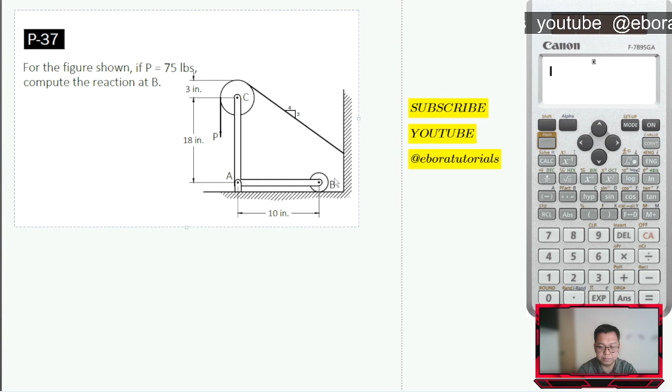Okay, so I think I now have an idea of how to answer this. Please correct me if needed, I'll double check as we go. So the only way I think I can answer this is by summing up moments at A. Otherwise we cannot do this since we don't have the reaction on the other side. We have the load P here, and an inclined force here. We'll be solving for RB, which is here.

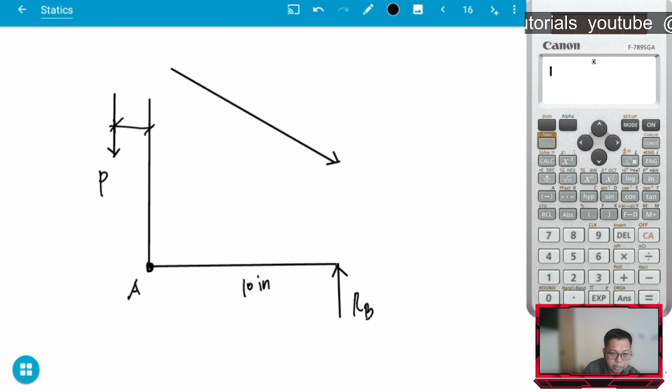So what I'll do is sum up moments at point A. This is our point A. What will rotate at point A, number one, is RB, which is 10 inches from point A - that's actually our goal. Aside from that, what will also rotate is this P, with a certain distance. This distance is just equal to the radius of the circle. Looking at the figure, that radius is equal to 3 inches as given.

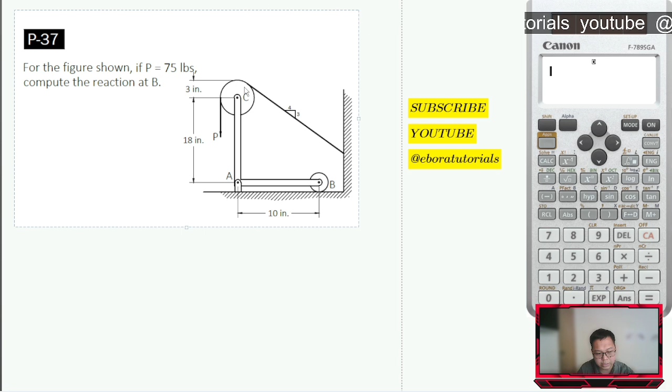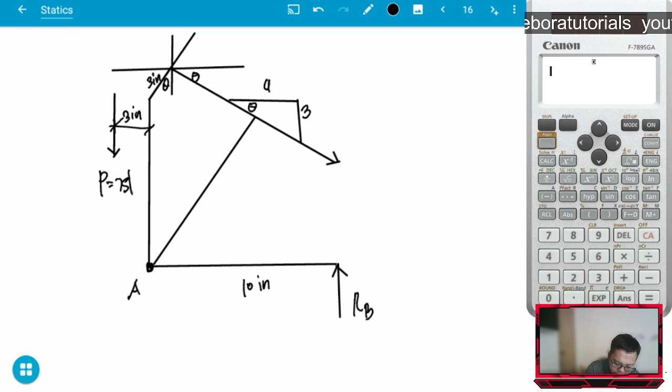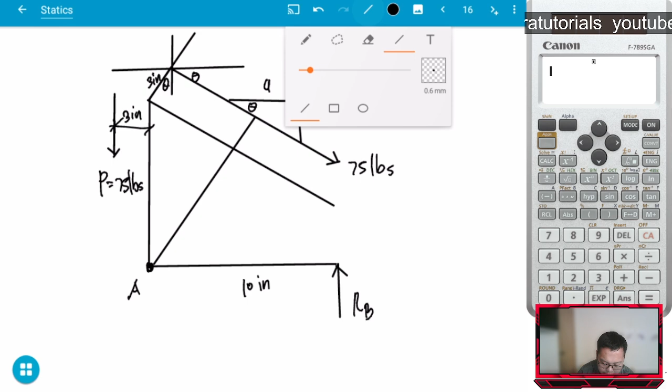We could use components, but since we'd still need a component anyway, why not go directly to the perpendicular distance. This load P is given as 75 pounds. So let's place that here. Okay, if that is theta, I hope you agree. Let's check this again - if that is theta, and this is straight, then theta... this is also theta.

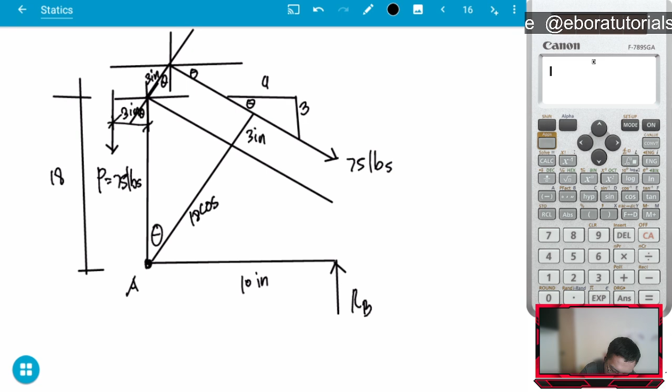It's important that we know theta. By the way, the height from here to here is 18 inches. Which gives us the distance for this - if this is 3 inches, then this is 18 cosine theta. I think that's it - we now have the moment arm for the two 75 pound forces. By the way, moment arm is the perpendicular distance. I think that's correct - 75, 3 inches, tangent, straight line, 3 inches.

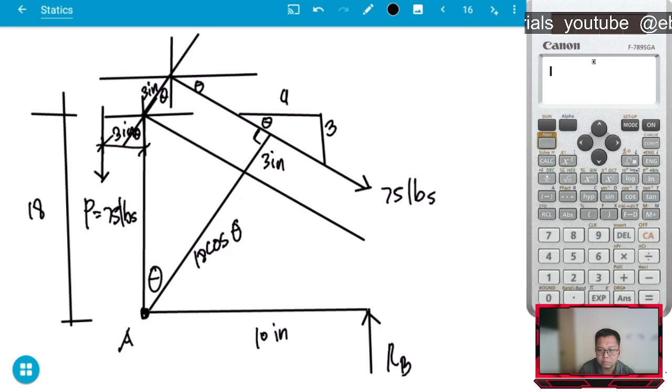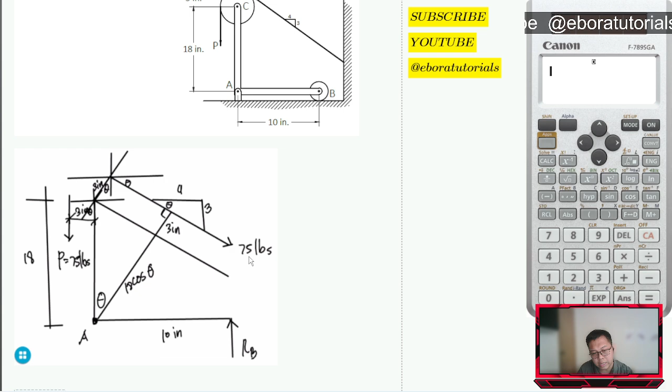Let's check. Let's move this and make it bigger. So again, we'll sum up moments at point A. Summation of moment at A equals 0, meaning clockwise equals counterclockwise. Looking at the figure, the clockwise moment, number 1, is this 75 pound force - that's clockwise. That's 75 with a moment arm equal to this. In case you ask where the 18 cosine theta came from, here it is.

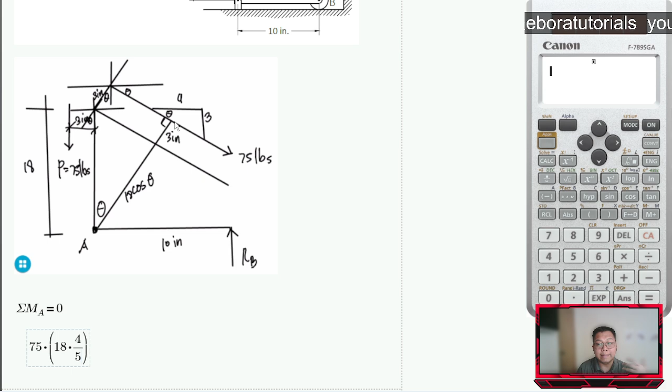By the way, what is this triangle? This is actually a 3-4 triangle with hypotenuse 5. Looking at the figure, what is cosine theta? Isn't that 4 over 5? So I can write 18 times cosine theta, or instead write it as 18 times 4 over 5, since based on this triangle, cosine theta is 4 over the hypotenuse 5.

This must equal the counterclockwise moment, number 1 caused by RB, so that's RB times 10. Then another clockwise moment caused by 75, that's 75 times moment arm 3. By the way, we forgot - that's 18 cosine theta plus 3, we forgot to add the plus 3.

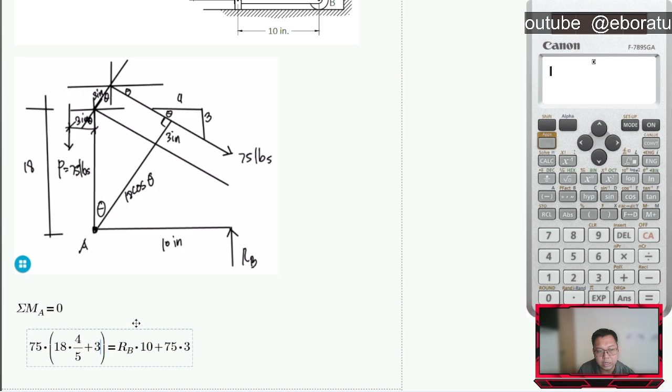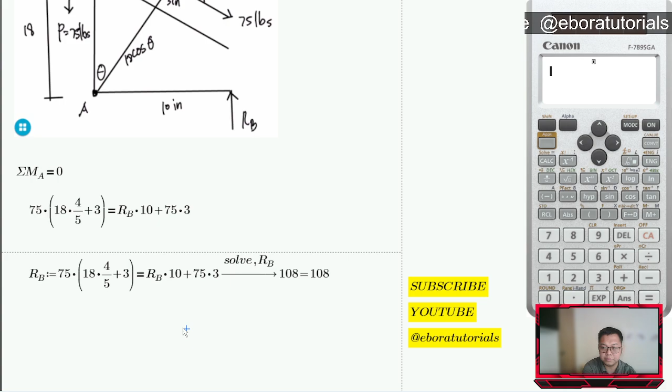Okay, I think we're good. Now let's sum up all the forces and solve for RB. You can solve for RB using your calculator - I'll just use what I have here. So RB equals 108. Let me check if that's correct. I think it's correct, no mistakes in our solution.